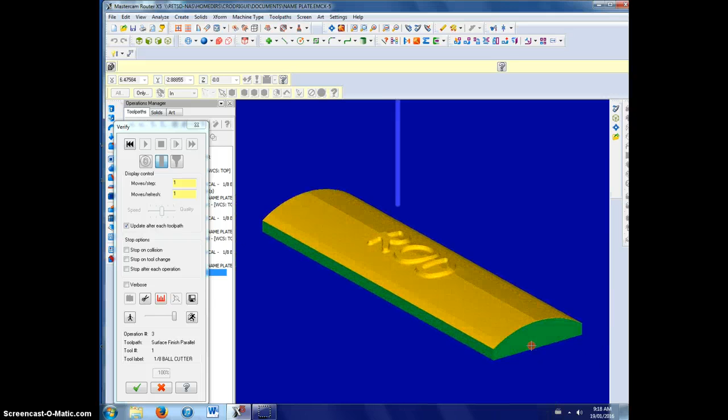This time we're going to be making this curved nameplate you can see. We're going to go step by step through it. If you've used Mastercam before, some of the features you'll remember, and if not, that's okay, we'll figure it all out together.

Alright, so we're going to be starting. This is the finished product. We're going to start new here. You would of course launch Mastercam X5 or X7 depending on which version you have on your computer, and it would pop up with this blank screen.

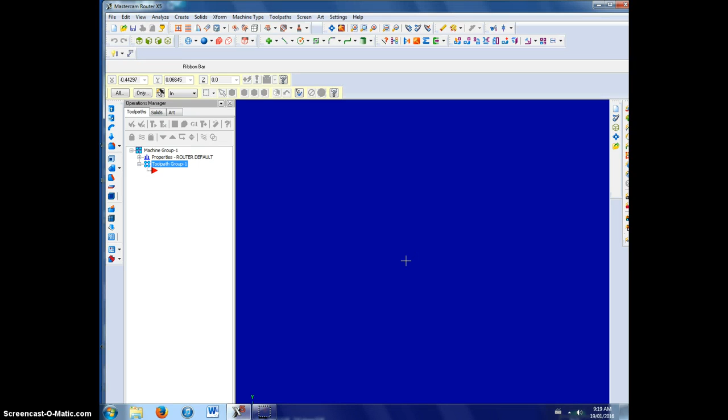So again, we go ahead and hit F9 and that brings up our axes. Now we always have a Y and an X axis just like your math class, and we're going to go ahead and work from there.

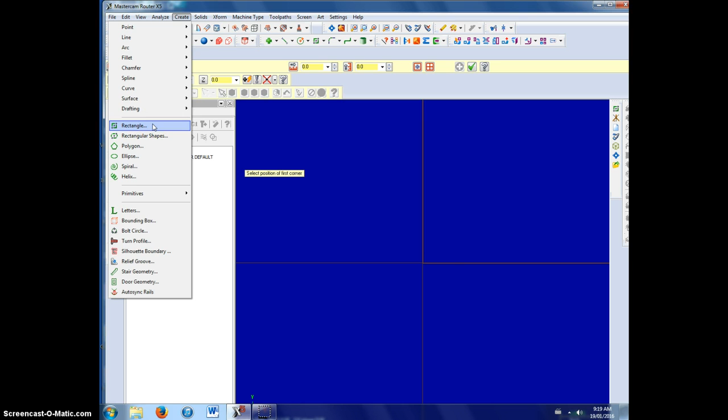Step one will be to create a rectangle. There are some buttons here for drawing rectangles. You can click on this spot to create a rectangle, and we're going to start at the origin. You could also go up to create and select whatever you'd like, rectangles, arcs, circles. We're ready to go, so I'll click on create rectangle. It snaps to the origin, and I'll click there and draw a rectangle.

Now how big I want this rectangle to be is 9 in width and 2.5 in height. And then we're going to go ahead and click OK. We're done drawing that rectangle, so we click OK.

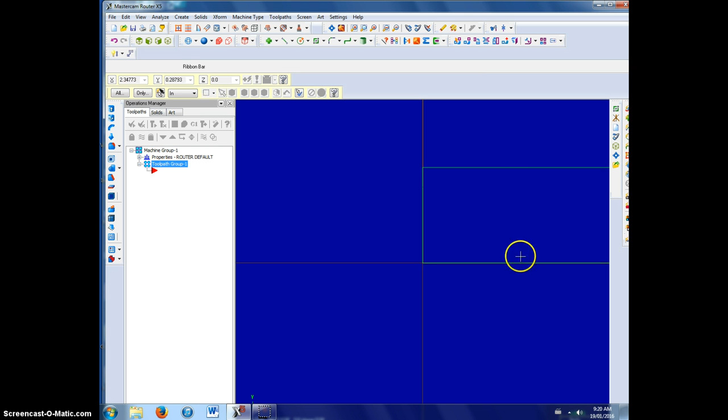You'll see we don't have that rectangle all in view. One of the buttons that's going to be your friend here is this blue arrow pointing in all directions, called the Fit button. When we click that, everything we've drawn is brought back into the screen. Okay, so we have that rectangle there.

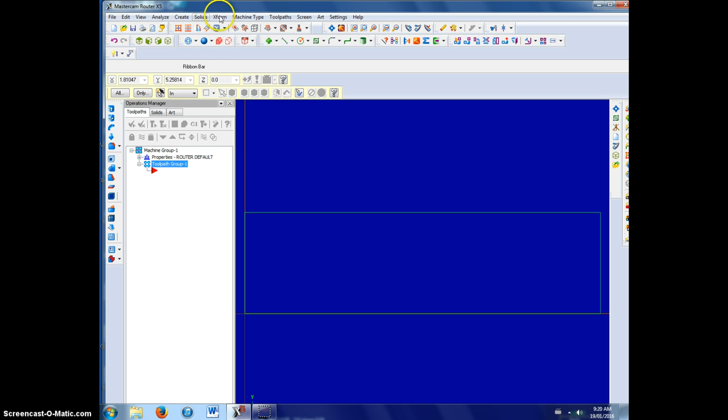The next step is we're going to want to offset that rectangle, making another one just outside of it that's a little bit bigger. So we're going to go to the transform menu, X-form, and use offset contour, because we're offsetting a contour, not just one line. We want to make sure we're on chaining, and we select it. It's going to select everything in that rectangle, you'll notice all the lines turned yellow. We click OK, and it pops up our offset contour menu.

We want to offset this rectangle 0.15 here, and we're copying it, not moving it, to make another one. We're going to say no to the corners. Now you'll see we have an exact copy, just a little bit bigger. We can go ahead and click OK at that point.

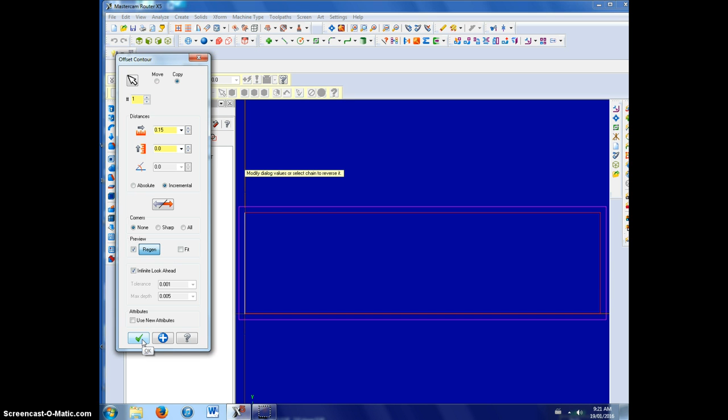So exciting, we have a couple of rectangles. We can hit fit again, and we can also use this button called clear colors. Why would we do that? You'll notice one is purple, one's red. Sometimes when you've deleted things, it doesn't delete it all, so we want to go ahead and hit clear colors, and that'll bring the drawing back to what it should be.

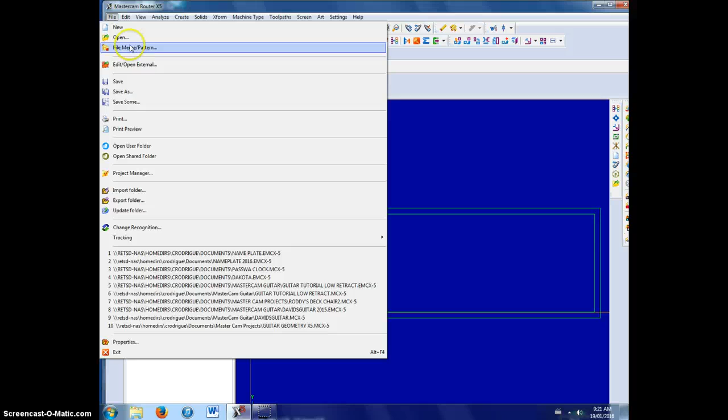We're going to at this point also save our document. Always important to save. I've had a lot of students over the years where they don't save, they get close to the end and the computer crashes or something happens, and we want to save pretty much every time we're successful with something.

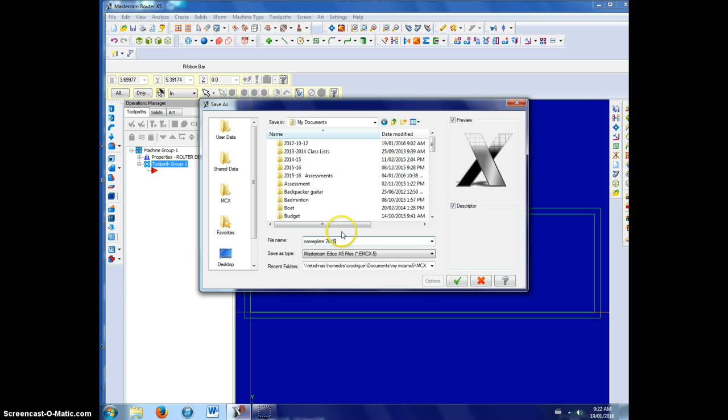So we're going to go ahead and click Save As. You'll make sure you're under your name and then your My Documents folder. This will allow you to work on any of the computers in the school division, because it's in your documents, it's following you around. We'll go ahead and call this Nameplate 2016. Do I want to replace it? Sure. Okay, so now we have that rectangle.

We have saved it. Every time we're successful, we can go ahead and push that save button. We'll always have a good copy.

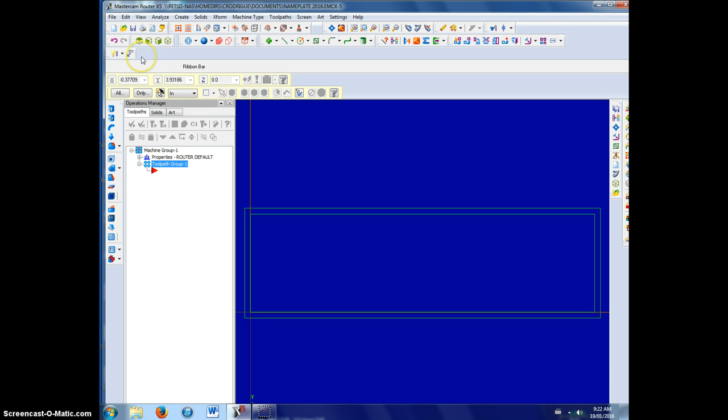Now what we need to do here is we're going to translate the z-axis to give this some depth. There are different views, of course. We're looking at the top view right now, directly from the top. We're going to look at an isometric view, which is kind of on an angle. You'll notice again we'll use our friend the Fit button, and we're going to translate that axis.

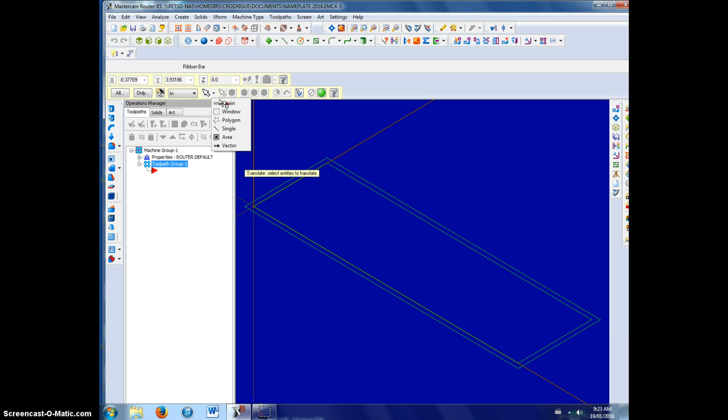So we're going to go to X-form, which means transform, and we are going to X-form translate. We want to make sure we're selecting with a chain here, so click this sub-menu and click chain. We're going to select the inside rectangle. You'll notice it all turns yellow, that's great.

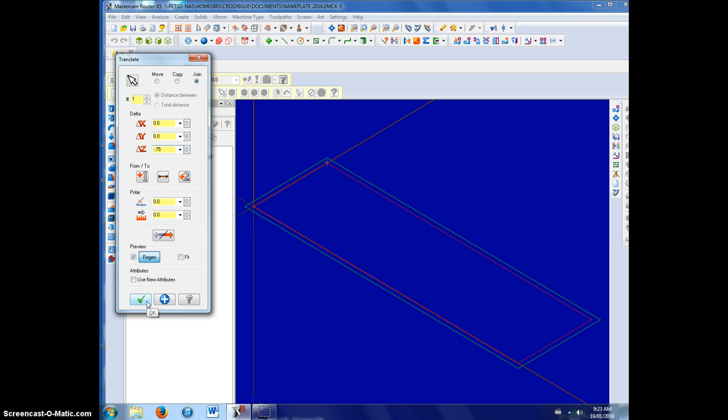We go ahead and hit End Selection because we're done with that. Up pops the Translate menu, and we're going to change this to join. We're not copying it, we're joining it because we're going to offset this down in the Z. This will remain at 0, this will remain at 0. Our Z is going to be set at -0.75 because that's the height of our sign, so that's how thick our sign is going to be. Everything else here should be good, and we go ahead and click OK or the green check mark.

Then we can go ahead and do Fit, Clear Colors, and push the Save button because we were successful. If yours looks like this, if you have that double rectangle on top and you've translated and joined them, you see it did those join lines there. If you have joined those together and it looks like that, you're good, go ahead and click Save.

We also have to do translation of these two lines here, and that's because we're going to be making this into a curved surface. So we're going to hit Transform, Translate again, and this time we're going to change this to a single line. We're not selecting the chain, we just want to select this line, so I'll click it, and then go down here and click this one. These are the inside rectangle, okay?

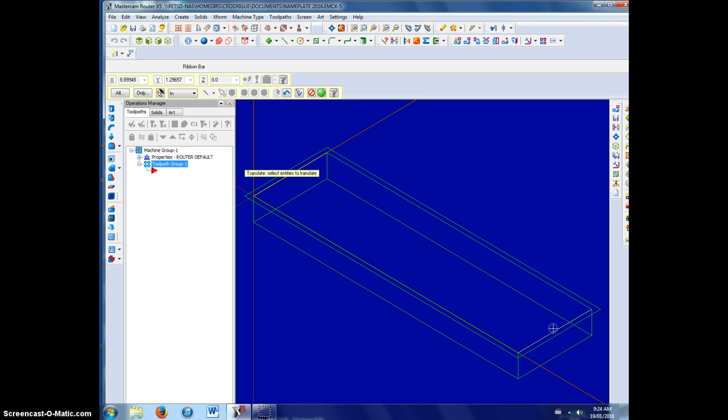If you have a hard time seeing that, you can roll in a bit for finer detail. I'll click End Selection again since I'm done selecting those two. They're both yellow, the only things that are yellow, which is important. This pops up again, and this time we're going to just copy it, not join it. Change that to copy, everything else stays the same except our Z.

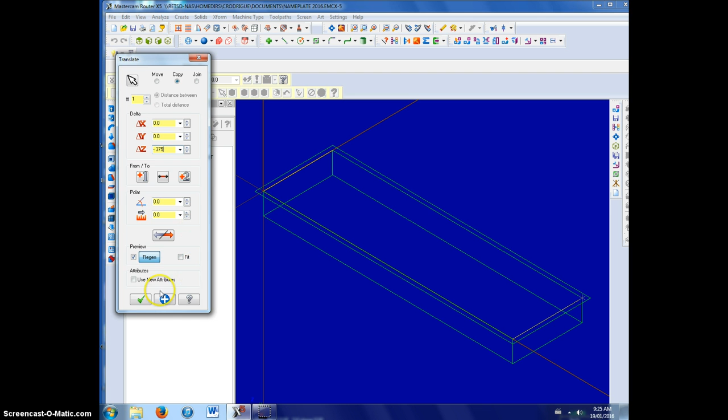We're going to change that to -0.375, and then click OK. You're going to hear me say this a lot: Fit, Clear Colors. If it looks like this, this block, this rectangle, and this line that just transformed down here, go ahead and click Save. Alright, fantastic.

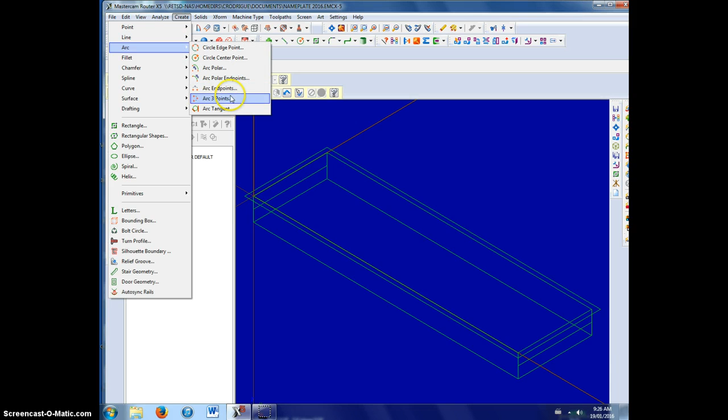We're going to continue on here. We're going to draw our arcs now because this is going to be a curved top, doing some 3D effect there. We're going to go Create, Arc, then Arc 3 points, and select that one. What we're going to do is select this first point here, this one in the middle.

You'll see how it snaps to where that intersection is. Click there, go to the middle of the inside rectangle line like that. You'll notice it snaps to the middle, it tells us where the middle is. We could put it here, but we want it right in the middle, so we click that because it tells us to. Then we go to this corner and you'll see it snaps like that.

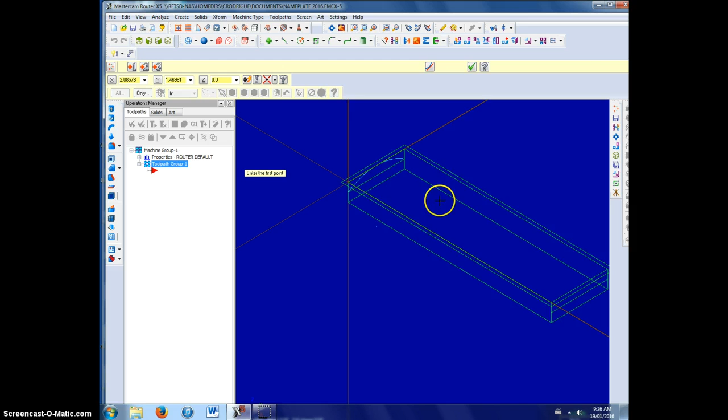Okay, great, we can draw another one over here, which is what we're going to do. I can use my arrows on my keyboard to kind of center that a bit, and I'll click. I'm going to go to the middle of that inside rectangle, click, and then do that there. Now I have those arcs there, and that's going to help give that top feature there. Alright, we go ahead and click OK.

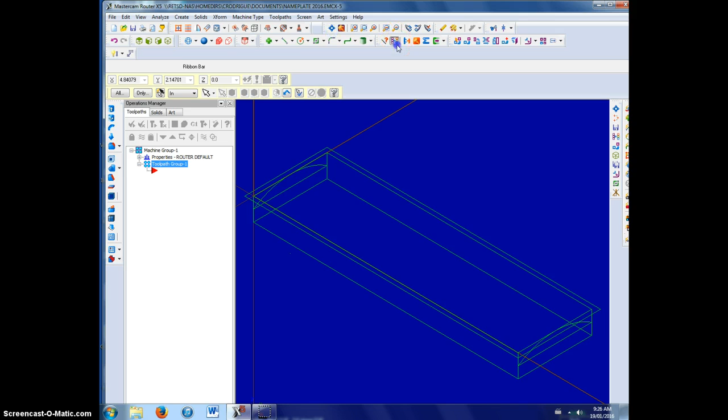We're going to go ahead, and if it looks like that, we do Fit, Clear Colors. I'll try and stop saying it. And if it looks like that, you're going to go ahead and click Save.